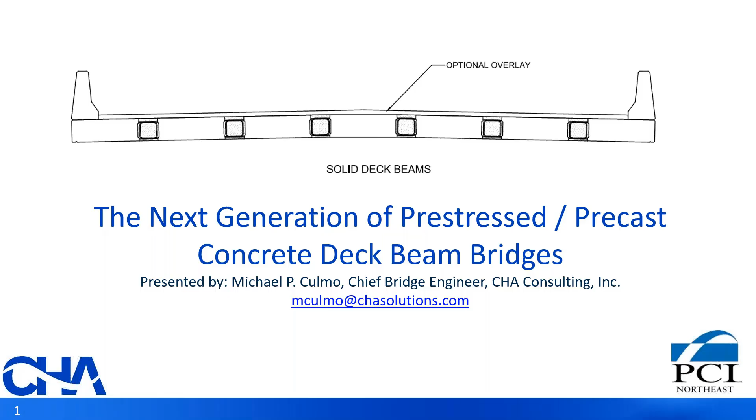So the objectives for today are to become familiar with this new product, learn why we developed this product—and I say we because it was done by a committee—and there are a few limitations, which we'll talk about.

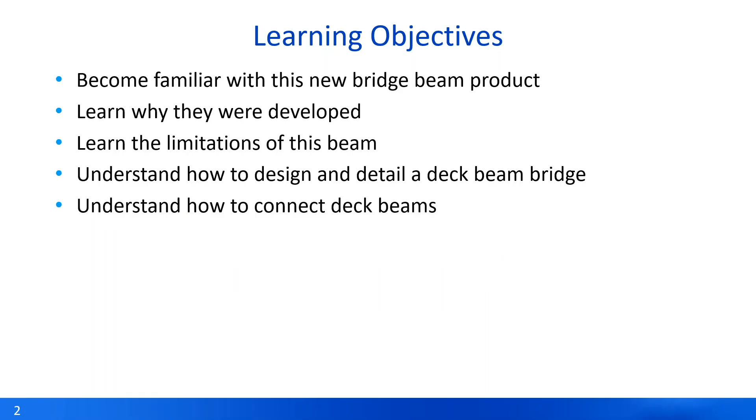Then we're going to talk about how to design and detail one of these bridges. You should be able to walk away from this presentation today with the ability to actually design and detail one of these in your state. Lastly, we're going to spend quite a bit of time talking about how to connect these deck beams, which is the primary innovation in these beams compared to previous versions of precast deck beams.

So what I'm going to present today, I'm here on behalf of the PCI Northeast Bridge Technical Committee. This is a committee that's been around since 1980. Alex Bardow, the state bridge engineer from Massachusetts, was the first member; I think I came on six months later, around 1980. So do the math—35 years we've been meeting. A very robust committee, and the key thing is the membership is not just industry—actually the majority of members are DOT bridge engineers. So it's very much a DOT-oriented committee, and we develop practical solutions to bridges using precast, pre-stressed concrete.

That worked on this particular document we'll talk about today. So we're here to talk about adjacent box beam bridges without topping slabs. That's the key thing about today's discussion.

In my 42-year career of designing bridges, we have a love-hate relationship with adjacent box beams and slab bridges. We love them because they're very thin. They give you a very thin superstructure, and if you've got issues with waterway clearance or roadway clearance, it's a great solution for that. They go together quickly, fast construction, that's a great thing.

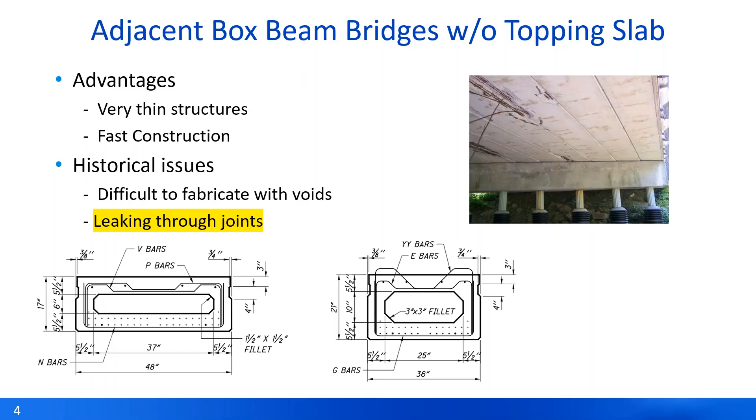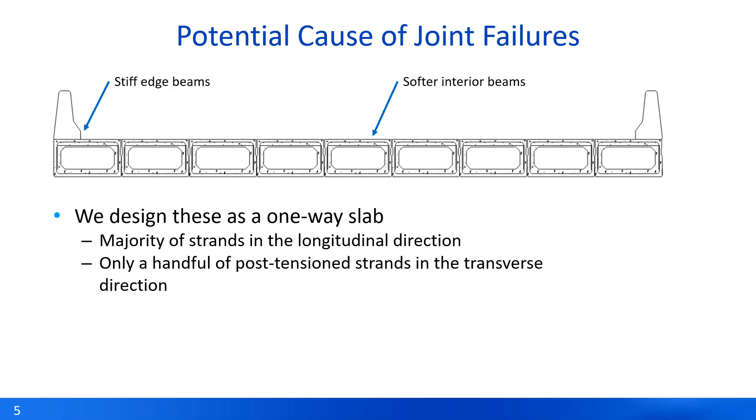Reality, though, it's not a one-way slab. It behaves like a two-way slab, primarily because of the width of the bridge and also the fact that we have stiff edge beams with the parapets cast on top. I'll cover in the next slide exactly how I think that behavior affects the joints.

AASHTO has recommendations for connecting these beams together. In this section of Article C4.6.2.2.1, which is on live load distribution factors, it shows this diagram, cross-section G, and you see the PT on there, and it says basically transverse post-tensioning shown for some cross-sections are intended to make the units act together. Then it says a minimum of 250 PSI pre-stress is recommended. Now, recommended is a key word - it's not mandatory, but it's recommended.

So if you take a 6-inch deep shear key and you do the math real quick, you find out you need 18 kips per foot of bridge. We typically use a fraction of this value, so we're not really connecting these details based on the recommendations in AASHTO for the transverse post-tensioning. I mean, the reality is I've seen research papers saying that we need 3 strands every 3 feet, the whole length of the bridge, which is really unrealistic in most cases.

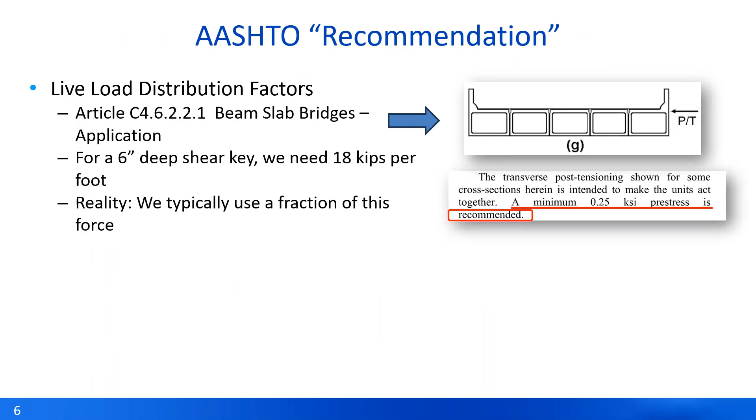So my theory about why these joints fail, and there are different opinions out there and different theories, but it's just what I've seen over the years, is that it's going to act as a two-way slab. You put a load in the middle of the bridge, so you have a truck in the middle of the bridge. We all know the center beams are going to deflect more than the fascia beams - that's just common understanding of structural behavior. But we have a stiff edge beam, especially with a parapet, that is not going to deflect this much.

What that results in is a deflected shape in cross-section, what I'm showing on the screen here. And you look at that deflected shape and you can see at the outside portions of the beam, you have negative bending across the joints, and in the middle of the bridge, you have positive bending. Well, the negative bending has the potential to open up those joints. And what I've seen over the years is that first interior joint is usually the first one that starts leaking.

So the behavior that we've seen in these bridges seems to defend this particular theory that I have. Again, I've read research papers that back this up as well. And as I said before, the research has shown the amount of transverse pre-stressing required is significant, and I don't know anybody who's actually putting that much pre-stress in these bridges because it's just not economical. There has been recent research done at the University of Cincinnati talking about thermal gradients that could cause joint failure. I don't disagree with that research either.

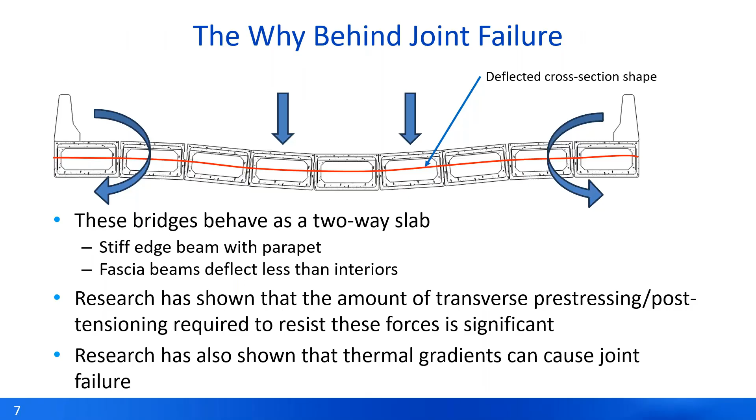I think it's part of the problem, but maybe not all of the problem. So what have we done in the past to solve this problem?

Many states are now adding a composite topping slab above these beams to solve the problems, essentially making it act like a composite I-girder or girder bridge. It does improve durability and definitely solves some of these problems. But the issue with this approach is it does thicken the structure.

We're losing some of that structural efficiency on the thickness of the structure for vertical clearance underneath. It does add cost, and it's significant. We're adding a lot of concrete, a lot of reinforcing steel. So you're adding cost to the bridge, making it thicker.

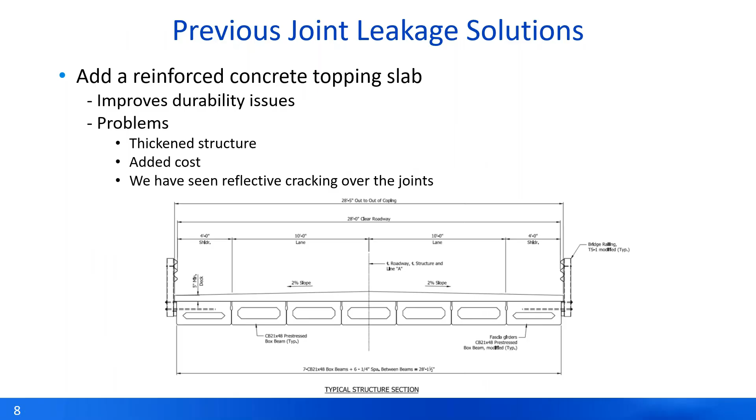And then the last bullet, I have seen on several locations around the Northeast especially, where we're starting to see reflective cracking through the joints, even with the topping slab. So it was a better solution than what we previously did, but I'm not 100% convinced it is the final solution. Nothing against this detail, a lot of states use it and it seems to work well, but we're starting to see some cracks showing up with these joints. So with that, our PCI Northeast Bridge Tech Committee decided to come up with a solution.

And I'll give credit where credit is due. The Vermont Agency of Transportation was the first state to come up with this idea. The idea was to take advantage of recent research on deck level connections, stuff that came out of the ABC world.

And if you're familiar with the next beams, and the next D beam, where the top flange of the D beam is the actual structural deck, and we have details to connect the top flanges with hook bars and reinforced concrete closure joints. Our goal is to take those details and marry them together into a slab bridge as shown on the bottom of the screen.

And our goal is to emulate, that's a word we use a lot in the world of prefabrication, a solid slab bridge. And what's really nice about that is it's covered very well in the AASHTO LRFD bridge design specifications. There are provisions for how to design a solid slab, cast in place concrete solid slab bridge. Our goal is to emulate the solid slab bridge with a precast option with precast members that are connected.

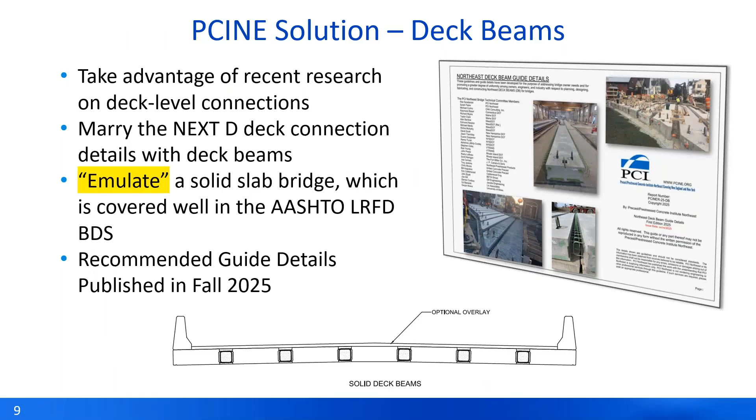So shown on the right side of the screen, PCI Northeast, we issued these recommended guide details. These details literally were published, the final publishing is happening this week. We included it in the handout in the chat box for this webinar. You can also go to www.pcine.org to download these documents.

So what do they look like? These beams are similar to a box beam or a slab that you've used for many years, with one big exception. It's got bars projecting out of the side of the beam that are similar to a next D beam closure joint. We're lapping these hook bars.

The photo in the center is a little bit off, the beams aren't quite close enough together, but we have lapped bars, and we fill that joint with concrete. We could also use ultra high performance concrete as well. The photo on the left shows the fabrication of one of these beams in the plant. This is from JP Carrara in Vermont. And the photo on the right is a bridge, I believe in Woodstock, Vermont, one of the first bridges built by Vermont Agency of Transportation.

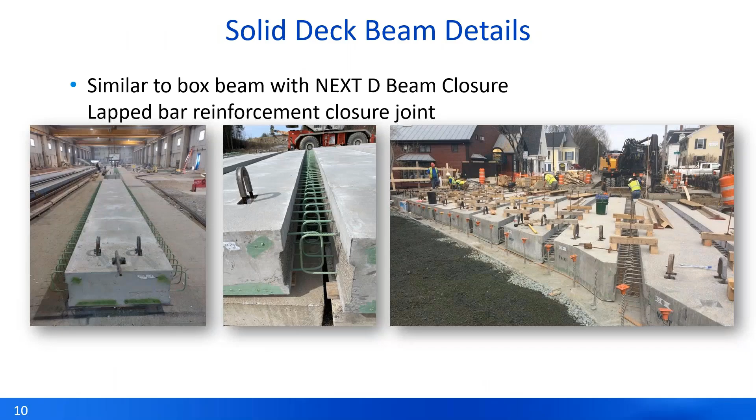So as far as span ranges, this table shows for typical products that we use. For the adjacent slabs, which are shallow pre-stressed beams, typically span up to about 50 feet. Box beams can span anywhere from 30 to almost 100, even a little over 100 feet. Next beams are in the range of 40 to 80 feet. Bulb Ts can handle spans 70 on up to well over 120 feet.

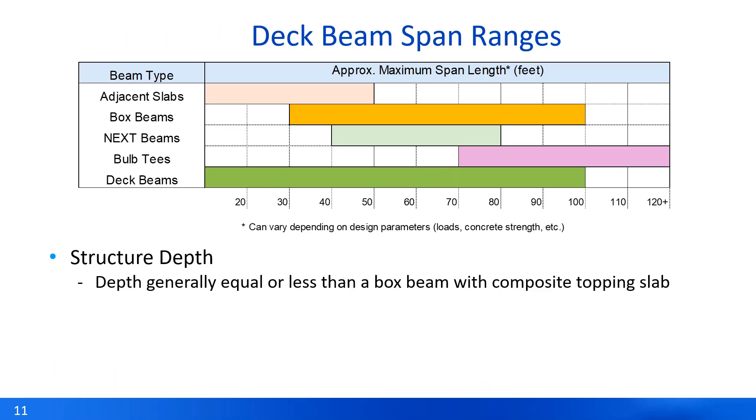These deck beams, though, we're looking at the family of deck beams that were developed will cover anything from 0 to very short span up to 100 feet. So it's a really wide range in the short span bridge market. These bridges are very much applicable to many, many short span bridges across the US. As far as structure depth goes, generally structure depth is going to be similar to a box beam or a composite or a deck beam with a composite slab topping. It will be thinner than that because we're eliminating that topping slab and going to just a simple deck beam with the vehicles driving right on top of the beams.

So here's the key features.

The key sides of these beams have full depth shear keys, and we have reinforcing projecting out the side of the beam to make these connections. There's a significant amount of reinforcing. We're looking at number 5 bars spaced at 6 inches typically used.

We are recommending only straight strand because while we can drape strands in these beams, it just complicates fabrication. And in most cases with debonding, we come up with a very similar design anyway.

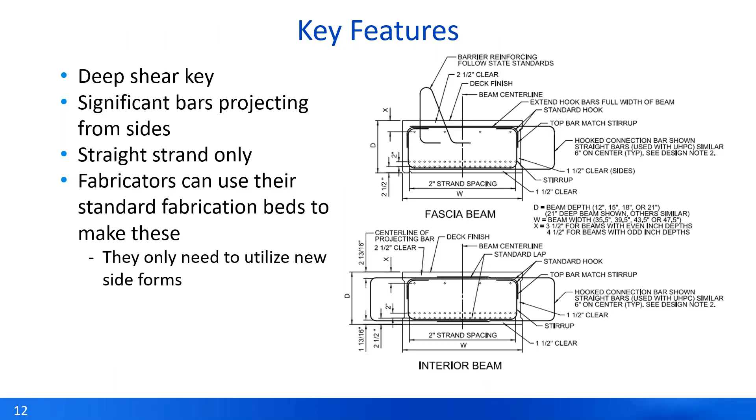Here's a key feature: the last bullet is these do not require custom forms. Any fabricator with a standard forming bed for building girders can make this. The only difference is that they have to fabricate new side forms, and I'll show some pictures of that in a minute. So we came up with 3 different types of deck beams for the committee, for short spans, medium spans, and if you want to go with spread beams to accommodate, say, utilities.

So the first, we call them solid deck beams. Now the word deck is in every one of these options we show, again, because we're driving directly on top of the beams without a topping slab. So solid deck beams are relatively short spans, up to about 55 feet. We're looking at beam depths of 12 to 21 inches. We're recommending no voids in the beams to save money in fabrication, and at these kind of spans, it doesn't save an awful lot to have voids in these beams.

We have 2 different details for connecting the beams. We have hook bars with cast in place concrete, and we also can use straight bars with UHPC, and they're shown in the 2 details to the right. The real difference from traditional slab beams is that the connecting bar is projecting from the sides.

As a committee, we decided to vary the width of these beams from 47.5 inches down to 35.5 inches. Don't get too riled up about the half-inch increments. That's a Northeast thing. Some states go 48 to 36, but the reality is these would work for any width that your fabricators in your region are familiar with producing.

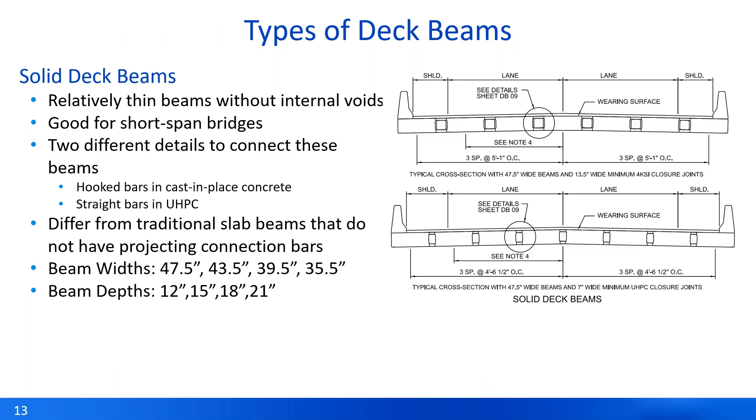The next one up, we went to box beams. We originally developed a solid deck beam with spans up to about 55 feet. We wanted to push it further, so we came up with very similar details to connect box beams. The connections are similar, just deeper. And again, they differ from traditional box beams because we have the projecting bars coming out the side of the beam.

Again, we're varying the beam widths from 47.5 to 35.5 in 4-inch increments, and we're varying the depth from 24 to 42 inches, beam depth in 3-inch increments. Technically, if your local fabricators can go deeper than 42, you can go deeper with these as well. It's just that's what we typically see in the Northeast.

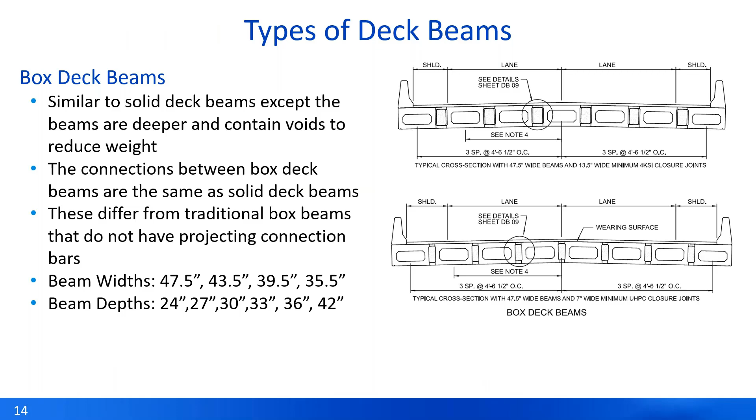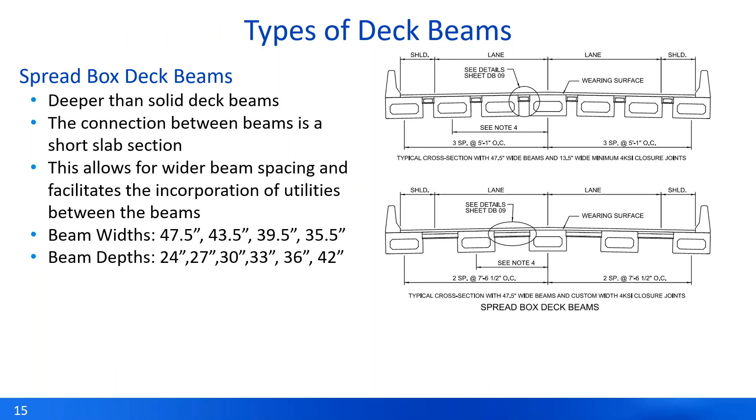The last one are spread box beams. A lot of states like using spread boxes. What's nice about them is they can handle utilities and maybe a more cost-effective solution because you're using fewer beams in a cross section. And we'll cover these details as well. You can see the dimensional variation is similar to the previous box beam details.

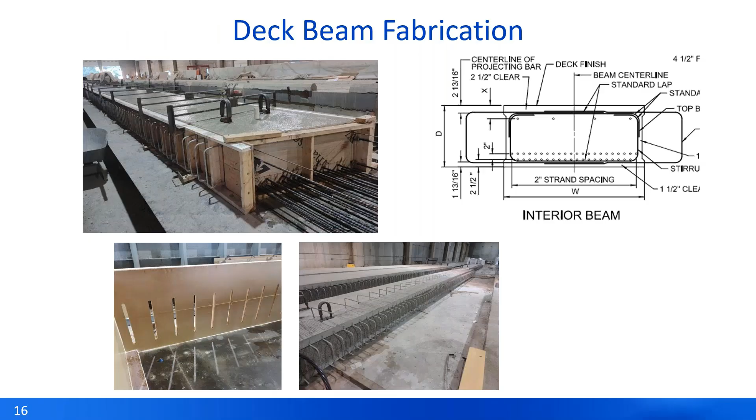It's very important to understand how this thing gets built, because the shape of the shear key and the location of those bars coming out of the side of the beam work together closely. The bars have to be just above and just below the shear key, and I'll show that in a bit why that's important. Another thing we developed as a committee is a cross-section geometry.

What's nice about these beams, as opposed to traditional box beams where you're married to the width of the box beam setting the width of the bridge—say if you have 48-inch box beams, you're stuck in 4-foot increments as far as bridge width. With these beams, we can vary the width of the beam, but we can also vary the width of the joint.

The details we've developed work for different width joints, so you can actually dial in an exact bridge width. We created a spreadsheet where, in minutes, you can enter a reinforced concrete joint with hook bars and the total width of the bridge, and quickly come up with a beam width and joint width that works to develop that exact cross section.

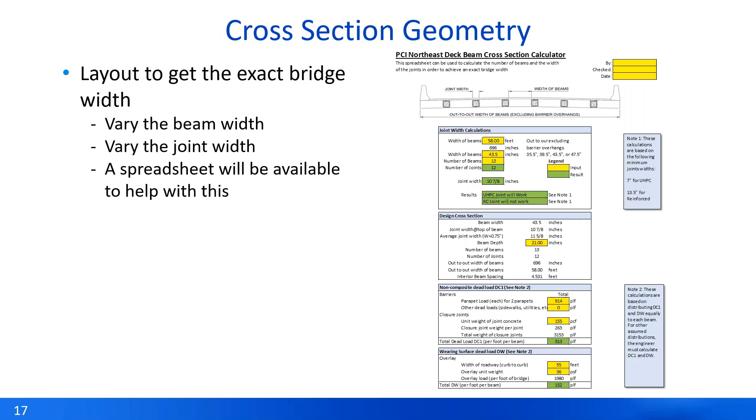Live load distribution is something we always need to figure out—how do we design these beams? This is where the AASHTO LRFD bridge specs come into play. AASHTO Article 4.6.2.3 is the equivalent strip width method for determining the portion of a slab bridge that resists bending moments and shear due to trucks—it's cross-section A in that article. It's based on the assumption that these beams are properly connected with distribution reinforcement that will emulate a slab-type bridge. So the key thing is we can simply calculate dimension E, which is the AASHTO calculation of the strip width where that portion of the bridge resists the loads. Then, knowing the beam spacing divided by E, we come up with a live load distribution factor, which is the percentage of the lane supported by each beam.

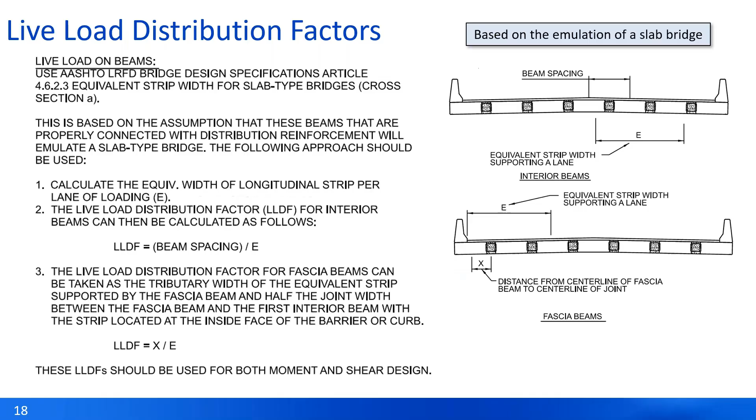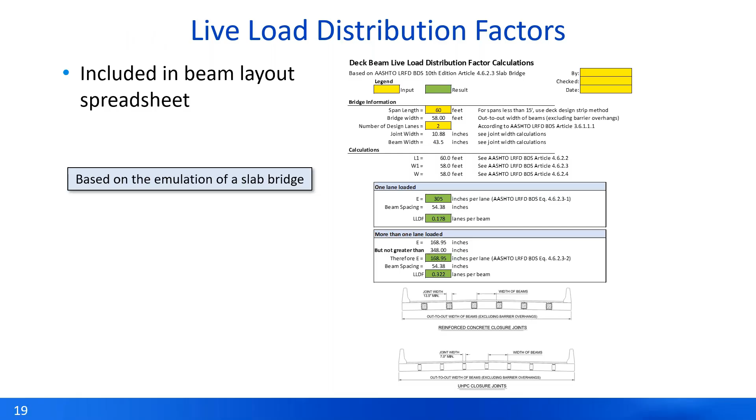As far as fascia beams go, we have a similar equation, looking at X divided by E. For distribution factors, we've created a spreadsheet—this is not complicated math. The AASHTO provisions are very straightforward for these types of bridges, and our spreadsheet will calculate distribution factors for multiple lanes loaded and single lane loaded.

PCI Northeast developed recommended guide details for a lot of the products our committee works on. Notice we don't say 'standards'—these are not considered standards, although they're very close, because each state can make minor revisions if they want. Our goal as a committee is to get states to have all the same details, but minor changes are definitely allowed. So we have a paragraph that basically says these are not standards, you have to do your own engineering, and we're not responsible for everything. But again, these are very close to standards, and they were published literally this week.

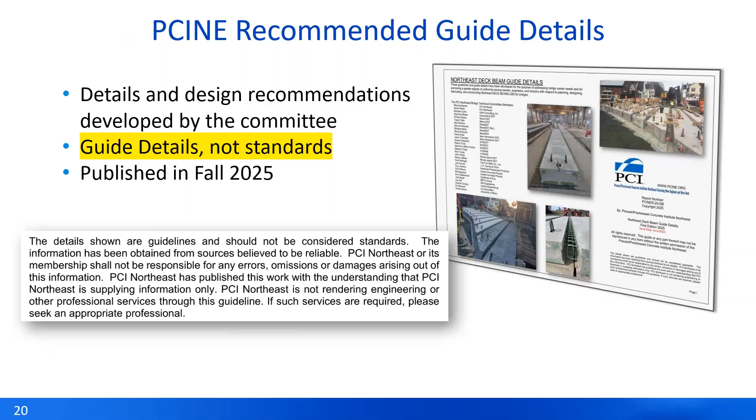Now we're going to spend the next portion of the presentation going through these guide detail sheets. I'm not going to go into a lot of detail because there's a lot of information on these sheets, but I'll hit the high points—you have copies and can download and review them at your leisure.

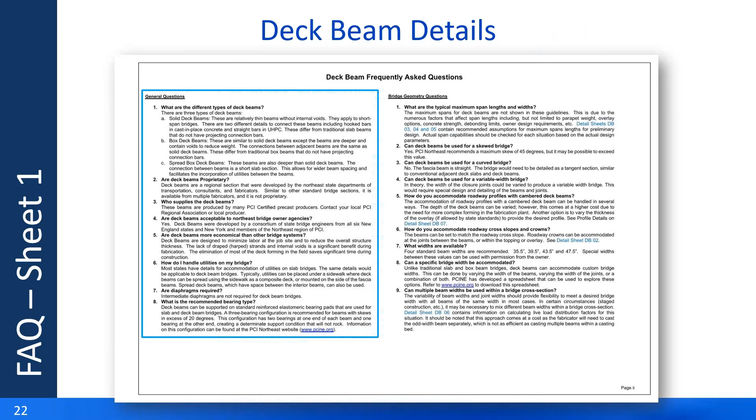The first several sheets are frequently asked question sheets, broken into different categories. The first category is general questions: first, defining what are these beams—what is a solid deck beam, box deck beam, and spread box deck beam? A big question is, are they proprietary? The answer is no—any PCI producer can produce these, not a problem.

Skipping a few—are they more economical than other bridge systems? That's a good question we've had asked. We don't have a huge history on cost, but by eliminating the voids and the reinforced topping slab, we're very confident these will be more cost effective than building a box beam bridge with a topping slab.

I'll talk about utilities—there are two options. You can hang utilities on the outside of the bridge, or if you have a sidewalk, you can spread the boxes underneath the sidewalk and have utilities there as well.

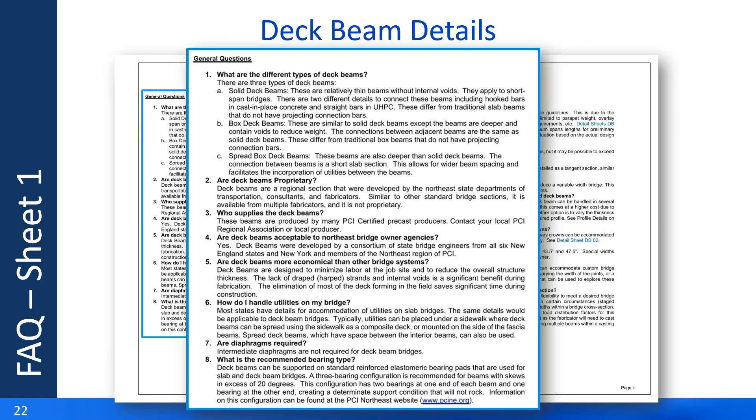As far as bearings, any bearing configuration you currently use for box beam bridges would be applicable to these as well. Some questions on bridge geometry.

We'll talk a little later about maximum span lengths, in the next slide or two. Can we use them on skewed bridges? Yes, we limit the skew to 45 degrees for detailing purposes. In theory you can go more than 45 degrees, but historically it gets complicated with detail.

Can they be used in a curved bridge? No, these are straight beams like any box beam bridge. You'd have to chord the bridge on the curve.

Can you do a variable width bridge? The answer is yes, you can. It can get pricey and complicated, but in theory you could vary the width of the joint across the length of the bridge. Haven't seen it done, but it could be done.

I'll talk a little later about profiles, how we handle profiles with these beams. Cross slopes, we typically set these beams on the cross slope of the road. As far as widths, we vary the beam width from 35.5 to 47.5, and we also vary the width of the joints. So for that reason, we can develop a specific bridge width and accommodate just about any bridge width that's out there.

Can multiple beam widths be used in a bridge cross section? We typically discourage this for cost. If you have one odd beam in a cross section, that's a custom fabrication for that one beam, and the price will be high. We have seen it, and my firm is actually designing a bridge right now in Massachusetts using two different beam widths for stage construction - stage one has one beam width, stage two has another. It was a very tight location, and the stage construction line was pretty well dictated by work off the bridge. That's okay because those beams will be fabricated at two different times, but in general we try to keep all the beams the same.

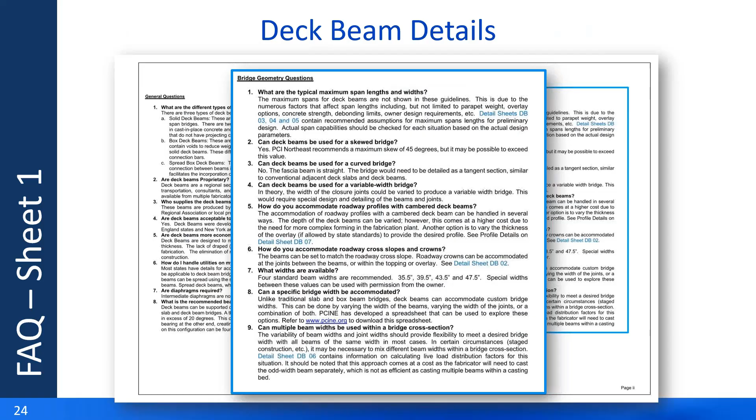Then we get into design questions on FAQ sheet 2, talking about what software you can use - really any software used for pre-stressed design would work. I talked about how to distribute dead load and live load.

Can I design the beams for continuity? Yes, if you can make a box beam bridge work for continuity, the same detail would work here. How do I design the connection between the deck beams and box beams? I'll cover that in later slides, but the answer is AASHTO article 5.12.2.1.

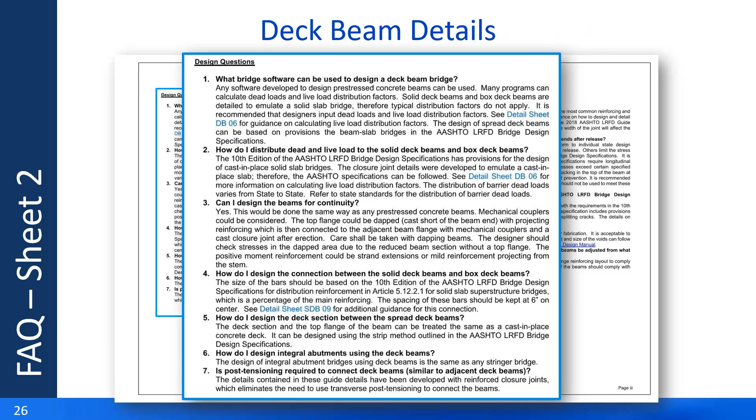Integral abutments - again, just like continuity, if you have details for integral abutments for box beams, they would work here. And is post-tensioning required? No, no post-tensioning is required transversely to connect these beams.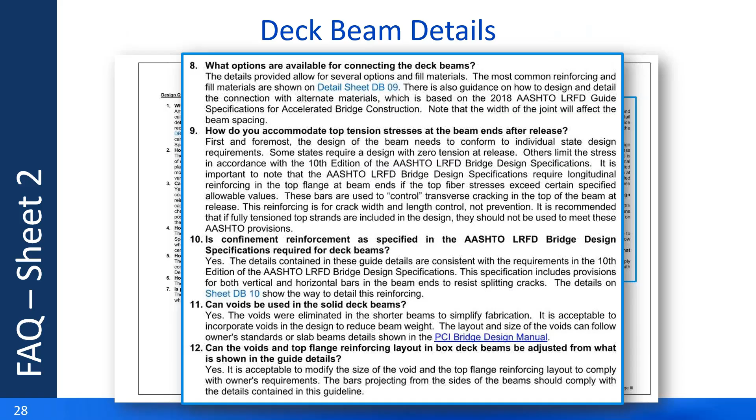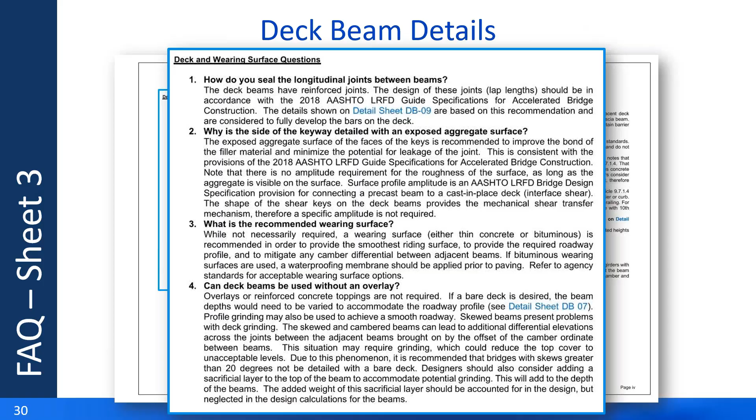The next FAQ sheet talks about deck and wearing surfaces. Again, there is no deck on top of these. We talk about the keyways - we use exposed aggregate surfaces on the keyways to control leakage. We do recommend a wearing surface, either concrete or bituminous, more for rideability and profile, to get these beams to a smooth surface. A thin overlay is something we'd recommend. In the Northeast, we use a lot of asphalt overlays with high quality waterproofing membranes.

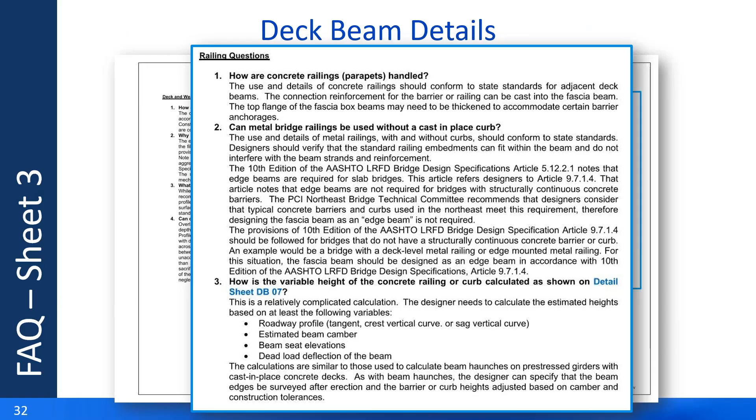Railings - there was a question submitted on railings. Any detail you currently use for adjacent box beams or adjacent slabs would be applicable to these bridges as well. The rest I'll cover in the detail sheets.

On the first detail sheet, we have general notes and design guidelines. We basically say you have to design the bridge - it's not something designed by the fabricator. The engineer of record has to design the bridge and specify strengths, just like with any precast beam bridge.

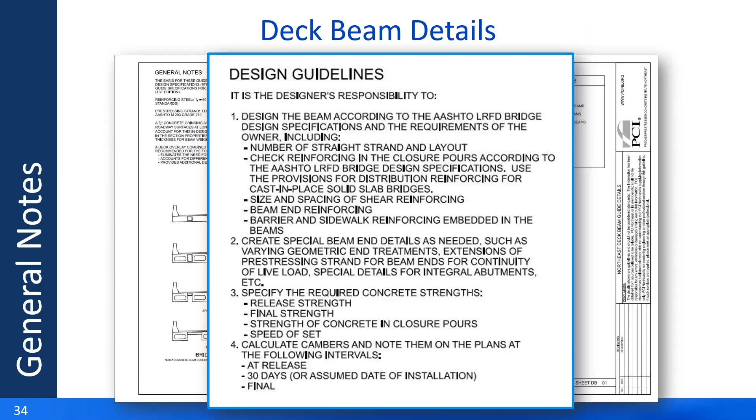As far as cross sections, we have several different options: solid deck beams with hook bars, box deck beams with hooked bars, spread deck beams, and spread deck beams with straight bars. So we have several different options to use, whatever your desire is for your bridge.

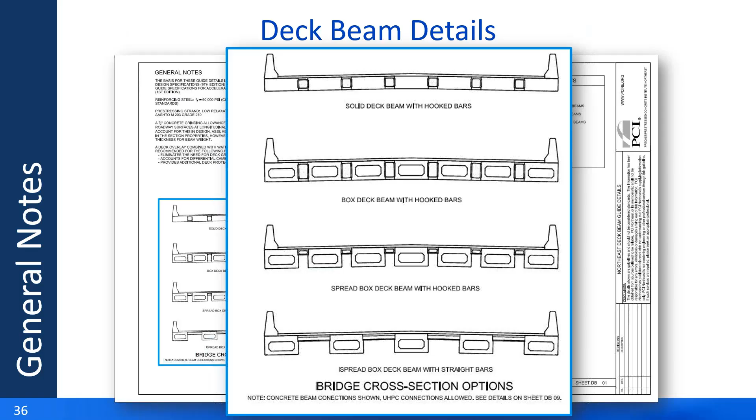This detail is very important. It covers the geometric configuration of each one of the beams. And the key thing is the shear keys. We do not want anyone changing the shear keys, because it affects a lot of reinforcing within the beam.

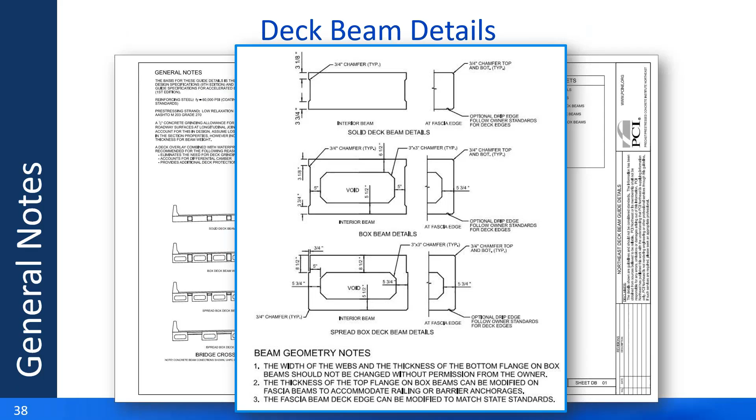Then the one on the bottom is the spread box beam. You'll see the top flange is a little thicker to accommodate the deck section that's cast between the beams. This note here shows these cross sections of the bridge. We're showing the minimum joint widths in these details, but you can vary the joint widths to provide an exact cross section.

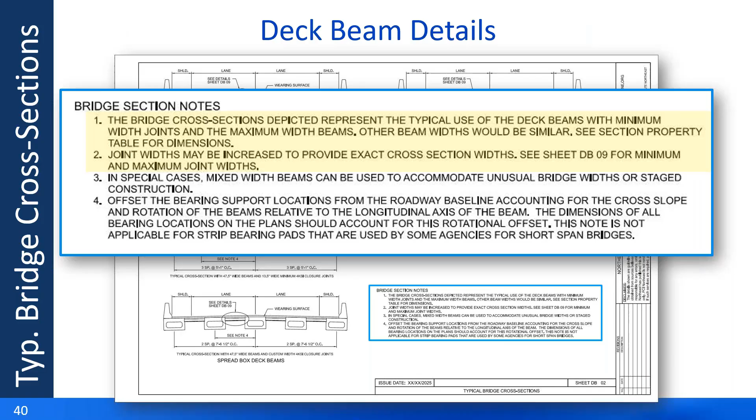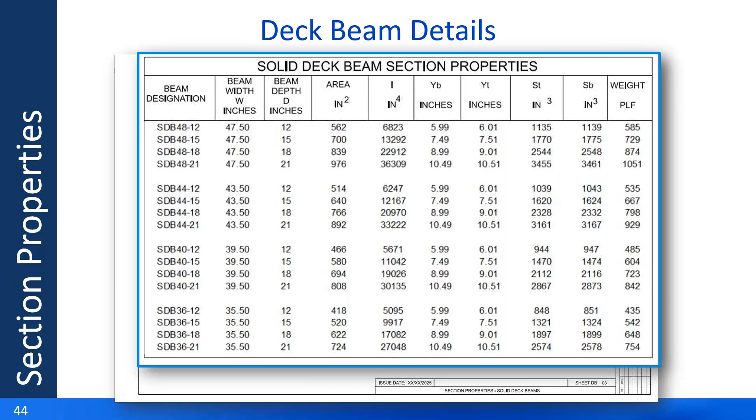Now, in the past with beams, we've actually developed span tables. We decided as a committee to go away from span tables. The reason is that typically there's about 20 assumptions made when you develop a span table for a beam, and in reality, for any particular bridge, probably 5 or 6 of those assumptions are not going to be valid, which means the maximum span length is not going to be valid.

So what we have found in preliminary design is that in general, we can meet the AASHTO LRFD requirements for span-depth ratios specified in Article 2.5.2.6.3. For the solid deck beams, every design we looked at met those requirements, so we can hit the minimum number for AASHTO. To be conservative, we're recommending using 90% of that value if you're doing a type study, your first shot at it—use 0.9 times that AASHTO value.

We developed a handy little equation: if you take the depth of the beam in inches and multiply by 2.5, you get an approximate maximum span length in feet. For instance, for a 24-inch deep beam, you'd get a span of 60 feet maximum. Approximate's the key word here—if you're really that close on span or structure thickness during a type study, you may want to run a preliminary design to make sure you can make it work.

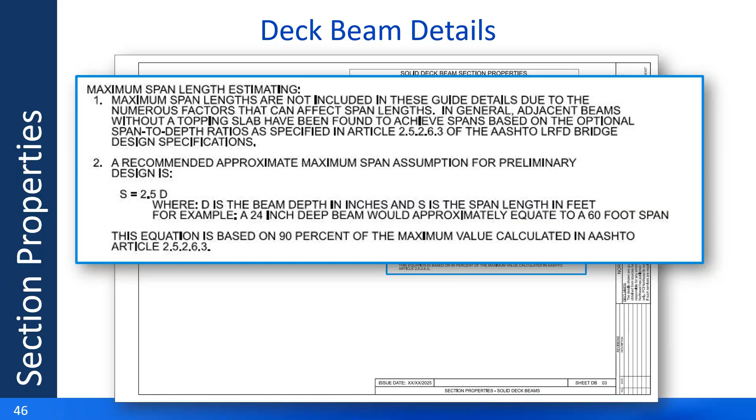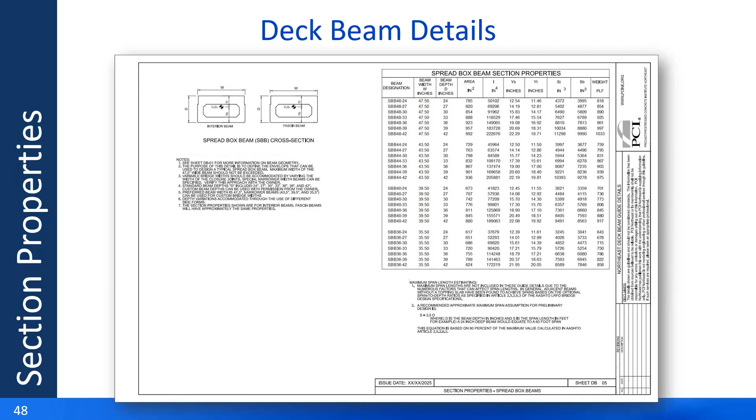So then we have section properties for the box deck beams. I won't cover those—essentially it's the same information we had on the previous sheet—and then for the spread deck beams as well. Now we'll get into live load distribution factors and some of the details.

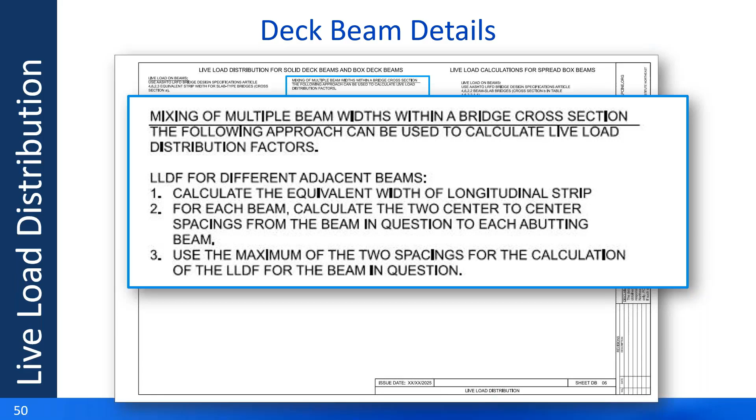On occasion, you may want to mix the beam widths—you may want to have 2 different beam widths in a cross section. So we give guidance for how to calculate the beam width and the live load distribution factors when you have different beam widths. Essentially, you look at the beam spacing on either side of the beam in question, and take the maximum of those 2 spacings to calculate the distribution factor for that beam. Remember, the live load distribution factor was just the beam spacing divided by the strip width E.

For spread box beams, it's a little bit different. AASHTO LRFD Article 4.6.2.2 does have distribution factors for spread box beams—it's in cross section b in the table. So you would use those equations for live load distribution for spread box beams.

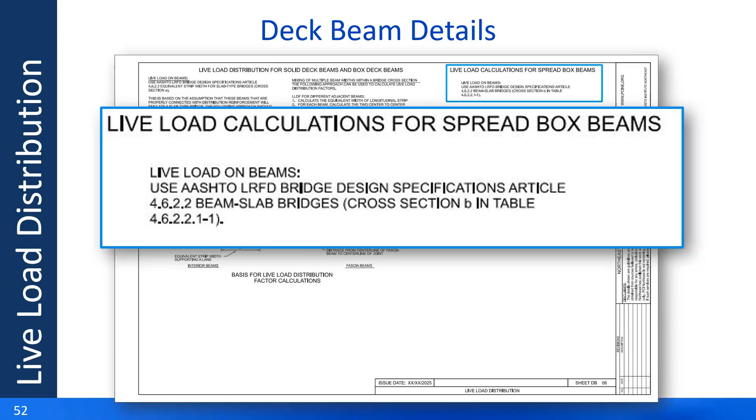Now we're going to talk about roadway profiles. The reality is when we cast a pre-stressed beam, it's going to come out with a certain camber. I could talk an entire hour or two on camber and camber issues, but really, the key thing is it's going to come out with a camber, and the chances of the roadway profile matching that beam camber are very low.

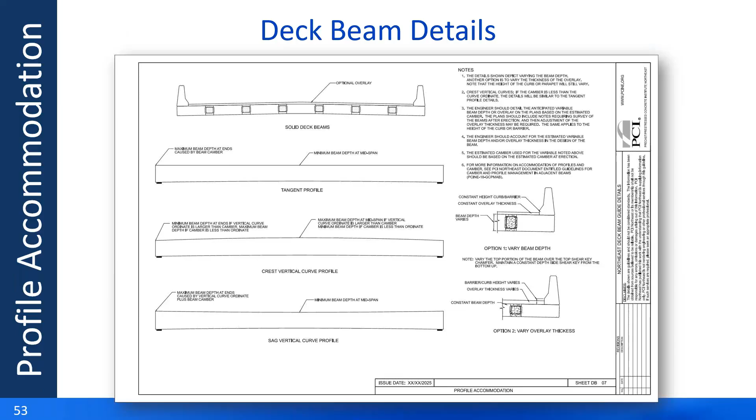The reality is we have to make some adjustments to accommodate the roadway profile with the camber of the beams. In this detail here, there are 3 different situations: a tangent profile, a crest vertical curve, and a sag vertical curve. One option is to vary the depth of the beam.

Some states are okay with this, and fabricators can definitely do this. It does increase the cost a little bit, and it can affect the design a little bit too, so you've got to be careful, but it can be done. You essentially cast the beam to match the roadway profile, taking into account the camber that you anticipate.

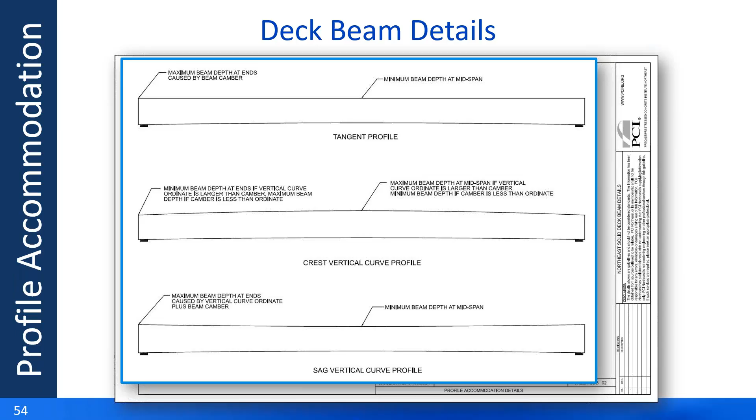Another option is to keep the beam depth constant, shown on the bottom of the screen as option 2, and vary the overlay if you have one. That's an option many states use. It's probably the cheapest option, and the engineer would calculate the thickness of the overlay based on the design camber. Keep in mind that the parapet or barrier height also varies to accommodate the variable overlay thickness. So you have 2 options.

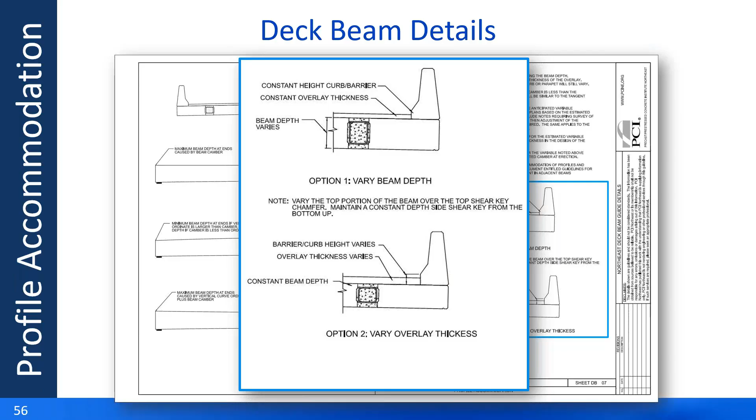The note in the middle is very important. If you decide to vary the depth of the beams, what we recommend is varying the top portion of the cross section. The portion of the beam above the shear key is what you would vary. You keep the shear key dimensions the same, measuring from the bottom, but vary that top dimension.

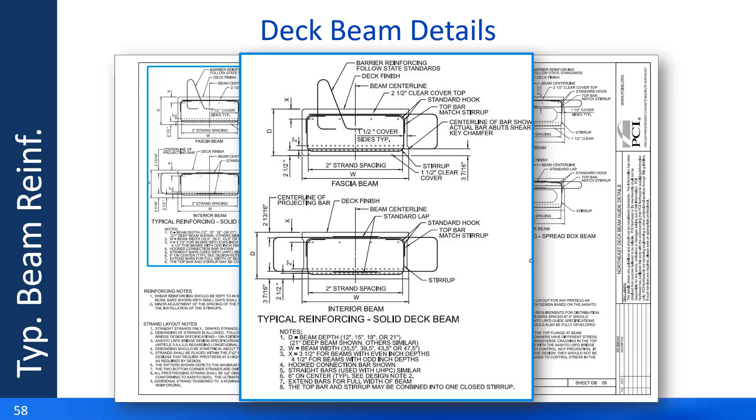We have some interesting dimensions here: the centerline of the bar coming out at 2 13/16, 3 7/16. That dimension is based on the number 5 bar and that's the centerline of the bar. It's an exact dimension because it puts the bottom of that bar just above the chamfer, and the top of the bar just below the chamfer. This facilitates form removal in the shop, and it's very important that we follow this.

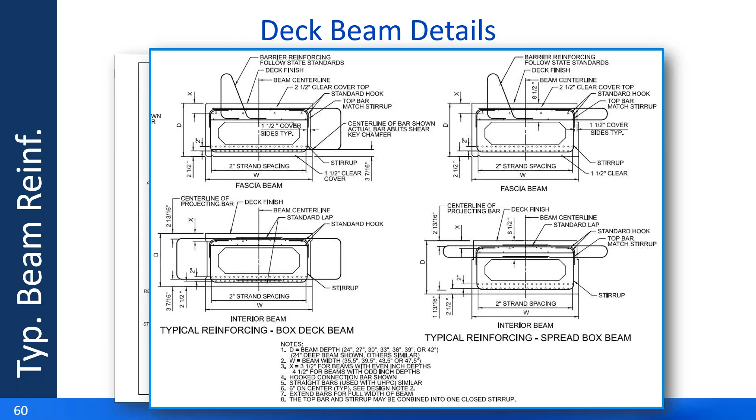For the box beams, similar details are shown on the left, very similar to the slabs. On the right are the spread box beams, which are a little different because now we have a reinforced concrete slab section between the beams. We have notes on the reinforcing, and we talk about strands and reinforcing.

We're recommending number 4 bars for shear reinforcing within the beam in most cases. We do say minor adjustments to the details, the longitudinal reinforcing and bars within the beam, can be changed to accommodate state standards. As far as strands go, we recommend straight strands with debonding, as discussed in the AASHTO LRFD articles regarding debonding limits.

That's pretty much all shown. The pattern shown depicts the maximum number of strands allowed. We're recommending 0.6-inch strand, pretty much like every other beam you design.

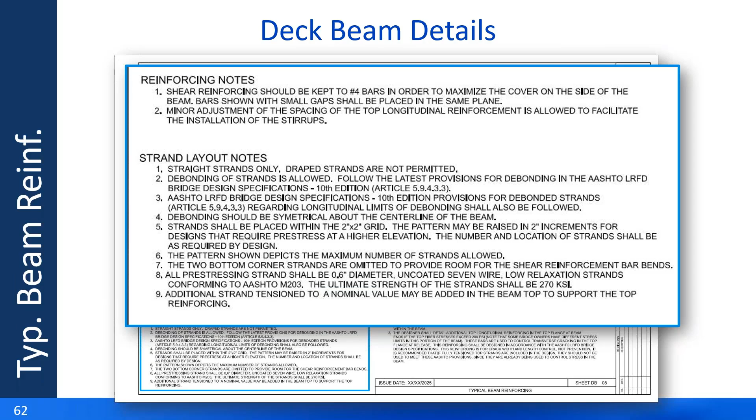As far as designing bars, one of the big questions we get is how do we design those hooked bars coming out of the side of the beam? If you look up the AASHTO provisions for slab bridges, Article 5.12.2.1, for a cast-in-place concrete slab bridge, one requirement is that you have distribution steel. Typically distribution steel are bars transverse to the main bars, or the strength bars - I guess the term we use is primary steel - in the bottom of the beam.

We have distribution bars because we are emulating a cast-in-place concrete slab. So it makes logical sense that the hook bars coming out of these beams would act as distribution steel as if it was a cast-in-place slab bridge. Therefore, we recommend designing the size of those bars based on this AASHTO requirement. Typically, in most cases, we come up with number 5 bars at 6 inches working. In a couple cases we've seen, maybe you have to go to number 6 bars, but 5s at 6 inches work in just about every case we looked at. So you size those bars based on this AASHTO provision for distribution steel.

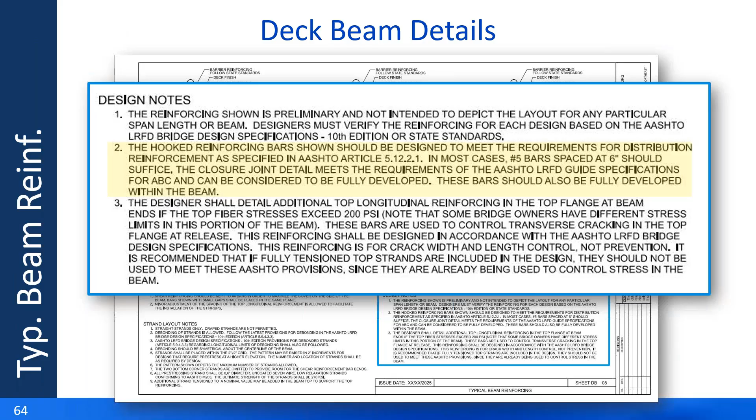And then from there, you could design the connection using details I'll cover in a few minutes. And here we go—these are the details for connecting these beams together.

Back one slide, just to notice, the spacing of these bars is 6 inches on center. We don't want to mess with that because the side forms have slots at 6 inches, which means we have a non-contact lap splice of 3 inches. This is all consistent with the AASHTO LRFD guide specs for ABC.

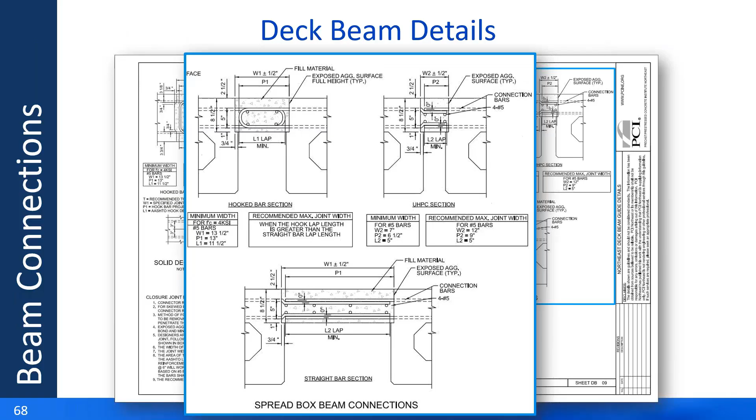So as far as designing these closure joints, as I mentioned before, we need to design reinforcement using the AASHTO LRFD guide specs for ABC. That has to do with the lap splice dimension required. And again, the area of the reinforcing bars is consistent with AASHTO Article 5.12.2.1 for transverse distribution steel in solid cast-in-place slabs.

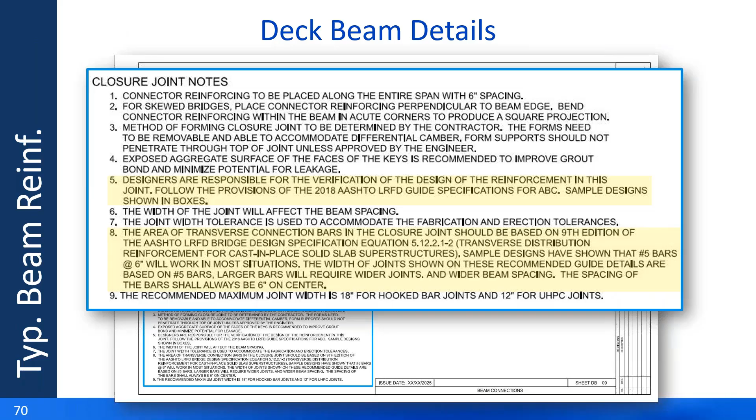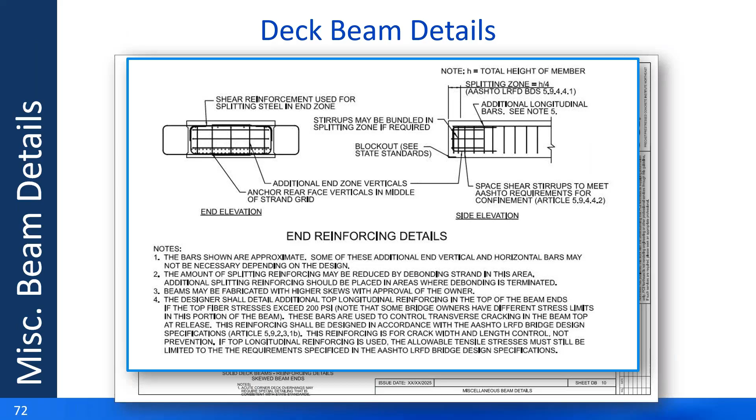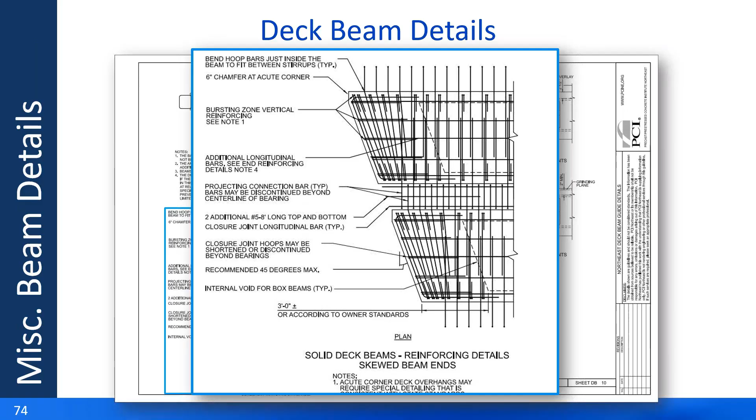And then skews—recommended details for skewed bridges. I mentioned before we recommend up to 45 degrees. The key thing is the projecting bars should be kept square—this facilitates form removal. The other thing is you do not have to carry those bars all the way to the end of the beam. It gets very congested at the ends of these beams, so we recommend stopping short. Once you get to the bearing, there's no need to go beyond that for connecting these beams.

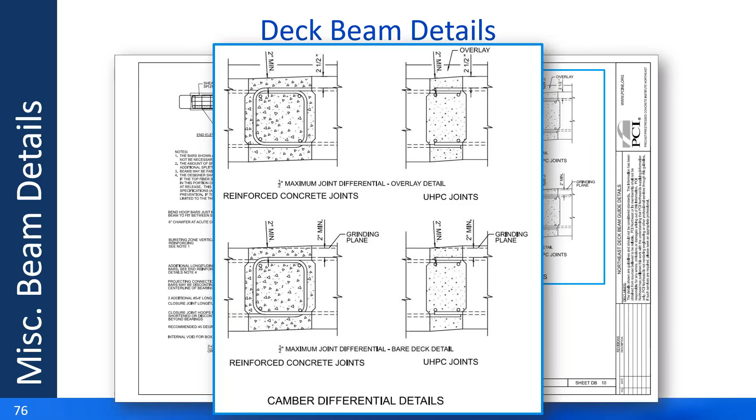Inevitably there's going to be differential camber between the beams, which is another reason why we like to go with overlays. We have details here showing how to handle differential camber. We recommend a maximum differential camber of 1/2 inch. PCI actually allows more than that, but we recommend a tighter differential camber. Managing camber is a whole other presentation I could give, but looking at these details, you see the bars coming out just above the shear key and just below the shear key. I can't emphasize that enough, but this just shows how we handle variable differential camber across the beams.

So in conclusion, the adjacent precast deck beams have had a checkered past—we've seen leakage through joints over the years. It's been problematic. One potential cause is the lack of a significant moment connection between the beams. So our PCI Northeast Bridge Tech Committee is looking to improve the performance of these beams by improving that connection. There are 3 types of deck beams that have been developed: slabs, box beams, and spread box beams. All of them have reinforced concrete moment connections between the beams, emulating a cast-in-place concrete slab.

And we feel this represents a significant improvement over previous deck beam designs. We've developed guide details and design recommendations, and they're available at

www.pcine.org. Don't go to pci.org, that's the main PCI national website. pcine.org is where you'll find these. And I'd like to thank the committee, our PCI Northeast Bridge Committee, for all their work in developing these sections.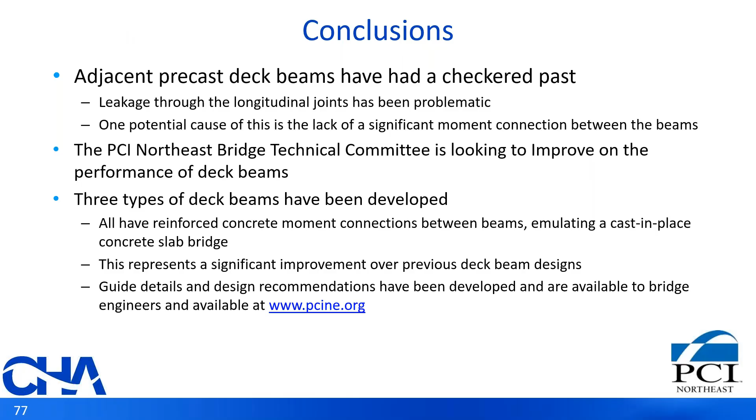So with that, I'll be happy to answer any questions we might have. Thank you very much, Mike. So usually Paul Lyles does our question and answer, but he's having some technical difficulties, so I am going to start. Hopefully he will join us. Jamal Elkaissi is also with us today. He is recently retired from FHWA.

All right, so we'll start with the pre-webinar questions. Has a traffic rail been tested while attached to one of the precast concrete beams? If so, how well did it perform? The answer is no, but as we said before, we're emulating a cast-in-place slab. So if your state has standard details for barriers on solid slab bridges, you can use those. If your state has standard details for adjacent slab or box beam bridges, you can use those as well. So the committee felt there was no need to go to that extreme for barriers because standards already exist for those types of barriers on these types of bridges. So I recommend using whatever state standard you have. And every state does it differently. I know, like in Ohio, they like bolting a railing on the outside of the fascia beam. That's fine. But other states embed anchor rods into the fascia beams as well. So there's different details out there, and they're all applicable.

All right, next question. Were live load deflections taken into account for the design tables? As I mentioned before, we did not develop span tables for this, and that's one of the reasons, because there are different requirements in different states for live load deflection. Some states don't consider live load deflections, others use the national recommended values. So again, we're getting away from span tables because I can't tell you how many times, like with next beams, we say a next 42 whatever can span 68 feet. And then PCI would get a phone call saying, I got a 68-foot bridge and I can't get the beam to work. Well, why? Well, I got a 42-inch concrete barrier, it's really heavy, and the dimensions of the bridge are different. So those 18 to 20 assumptions that we use to develop the table, inevitably 4 or 5 of those are not applicable, which means I can't get to that span length.